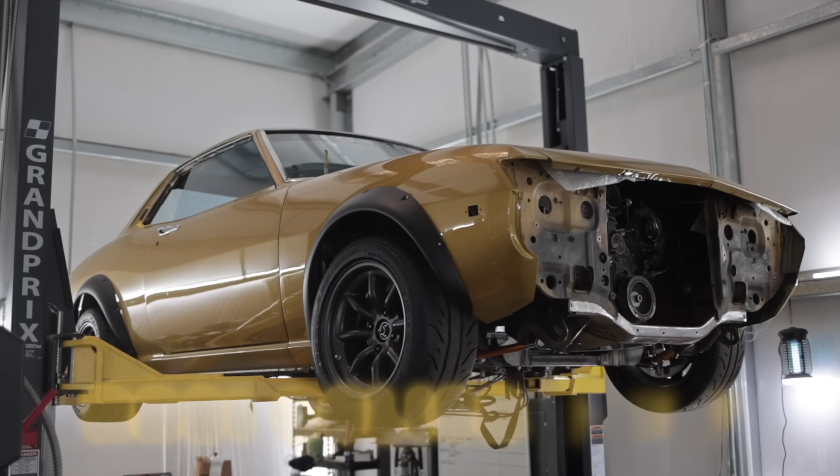Welcome to this. My 1974 RA21 Toyota Celica that will soon house this high compression built NA 2UZ V8.

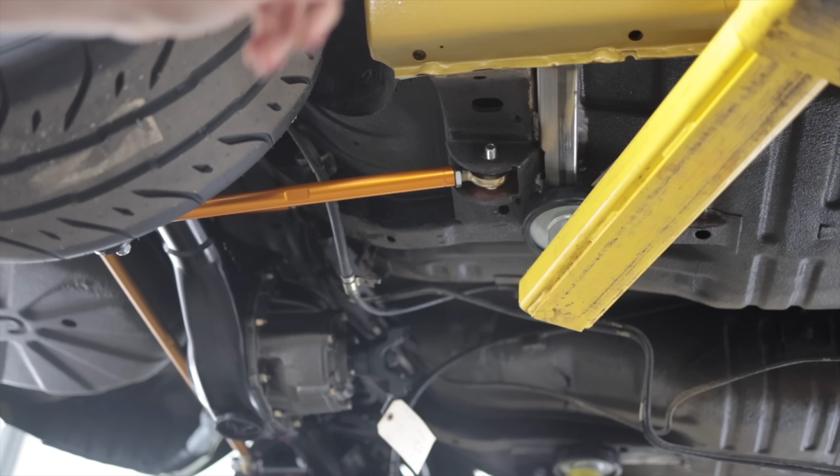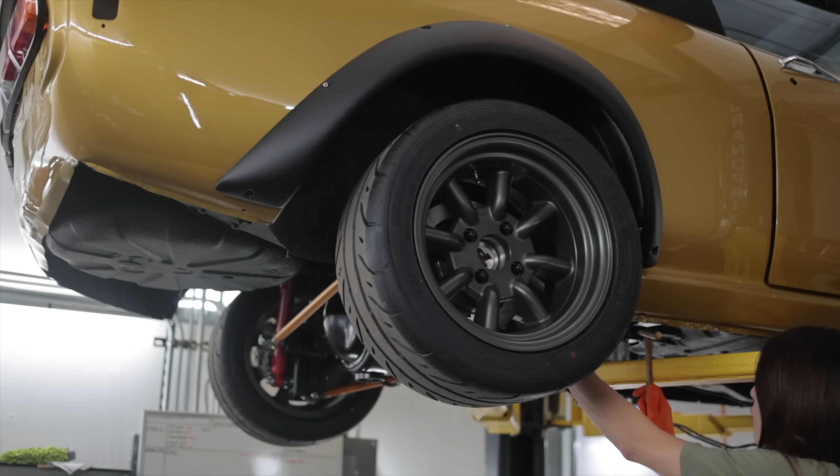If you're new and you'd like to get caught up on the last video where I attempted to teach myself how to TIG weld, up above my head is a link. That requires some welding, so I'm gonna try to actually put that to practice, even though I need more practice. The one thing I am capable of that I can say with certainty is tacking.

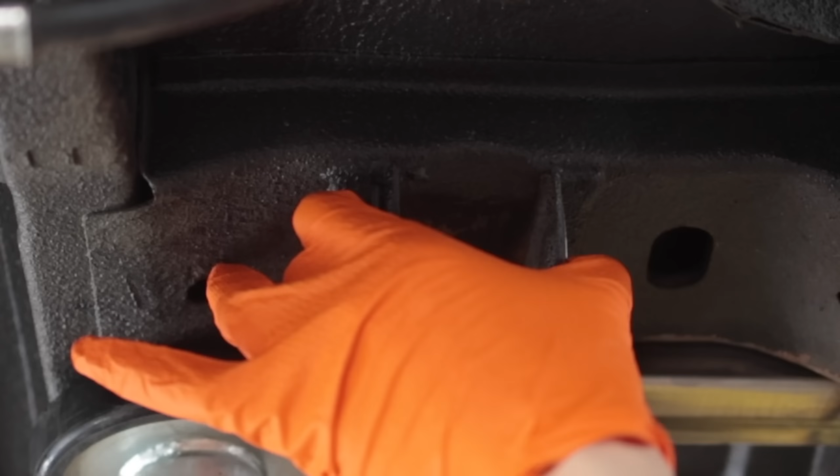If you recall two videos ago, I custom fabricated these little pieces for the lower four-link with the assistance of the plasma table at the shop next door. They need to get welded into place approximately like that, which I feel I am definitely more than capable of doing. So, okay, that's not light.

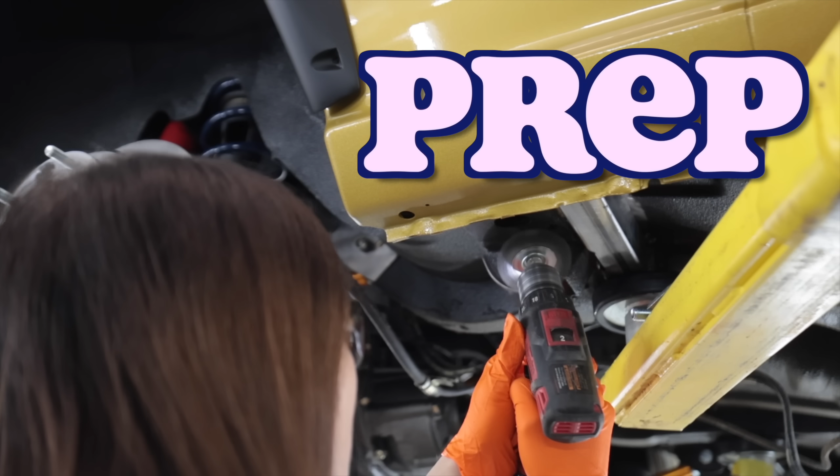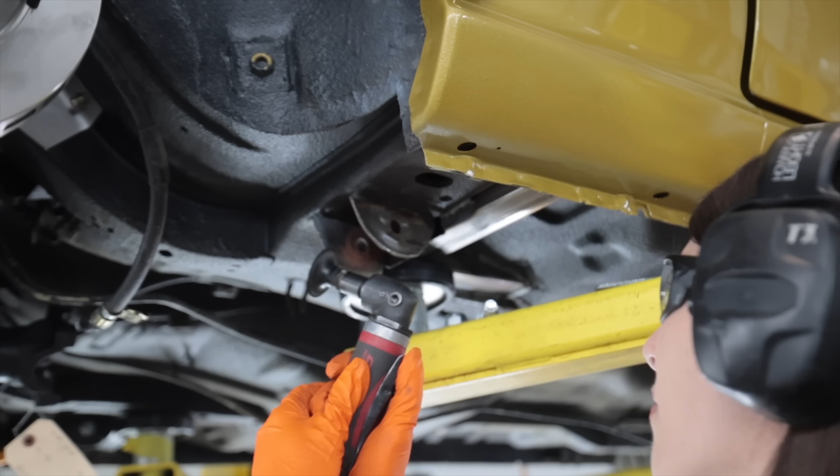Oh, last thing I want is sparks all over my watts. For those of you who never had the pleasure of smelling hot burning rubber undercoating, let's try a baby flapper disc for a Dremel. Maybe this will work. It smells a bit like a dumpster full of tires on fire. Yeah, it works like crap. Yeah, that's better. And that's definitely the last thing you want on a metal surface you're gonna try to weld, especially with a TIG welder. It has to be spotless.

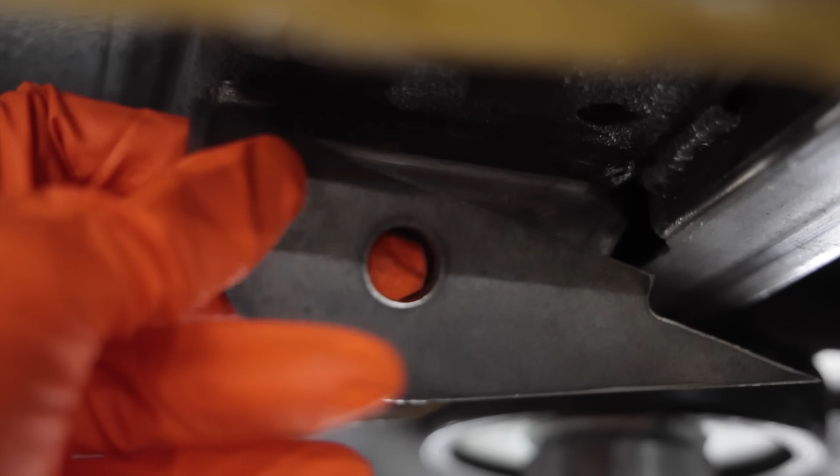I just realized I don't have any weld-through primer. When these two pieces are joined together with weld along the edges, there's gonna be a gap slightly through the bolt hole, and for obvious reasons I'm not gonna try to weld that bolt hole, it's just asking to break drill bits. I think what I'll try to do is take seam sealer and block off the backside and smush it down inside that hole. Then once a bolt is tight against it, I don't think there's any way a water molecule will be able to get down inside there.

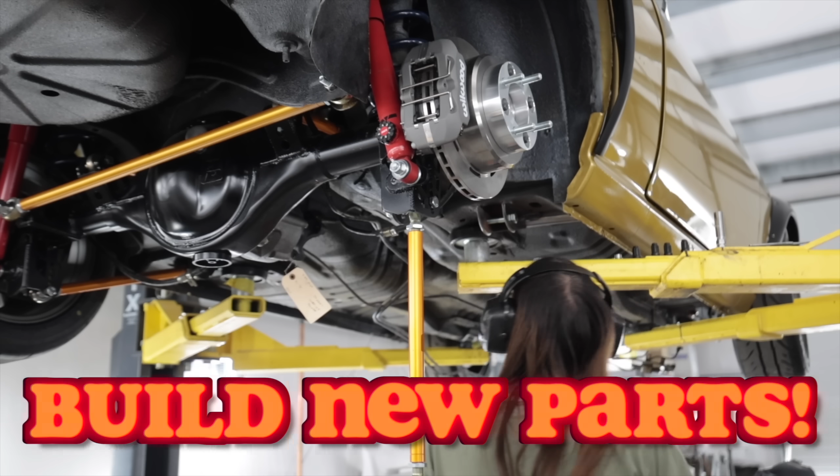That's good right there, gas. Gas flow is set just about 20 at the bottle. I zip tied the hand control to the torch, kind of where my index finger would naturally rest while I'm using it. In the last video I used the torch in my left hand, even though I'm right-handed, thinking it would be easier, but I don't think it is.

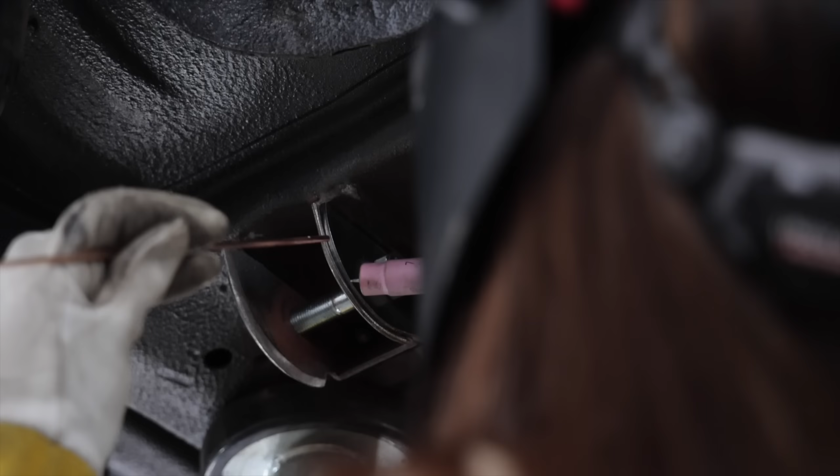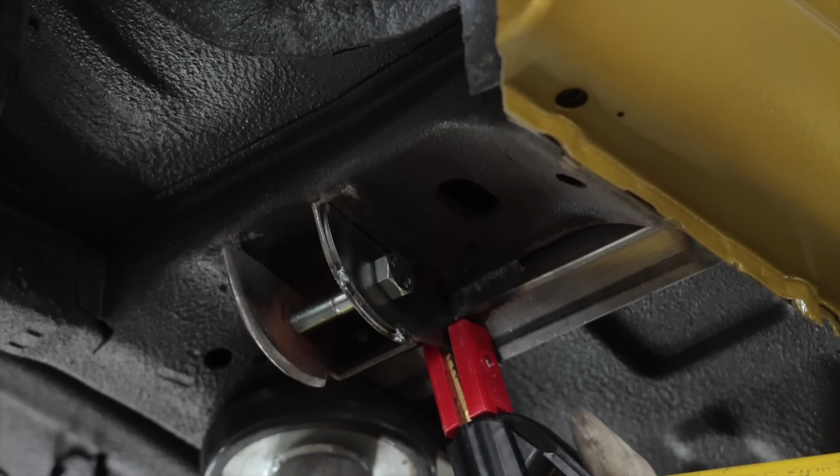I haven't had a chance to weld anything else since the last video went up because you watch every second I'm awake, essentially, on this channel, but I will try to slowly incorporate it more and more so I can get better at it. I think that'll hold it together. Even though the four-link uses Heim joints, so I don't really have to worry about it pinching because it can still pivot regardless. Aha, it's tacked.

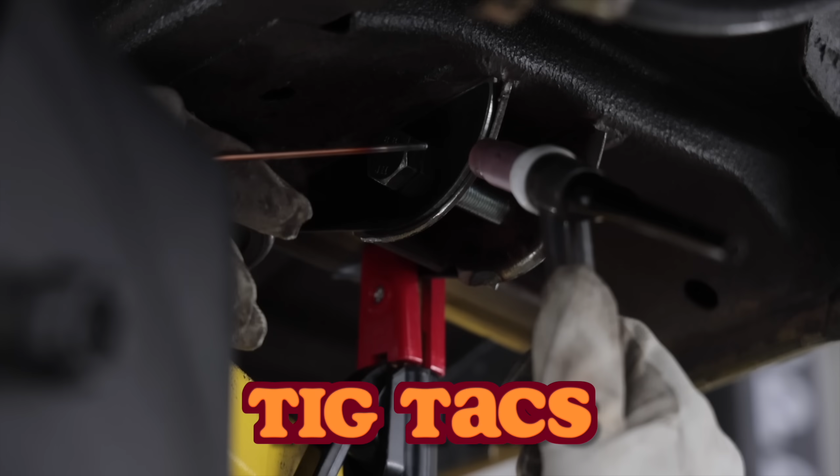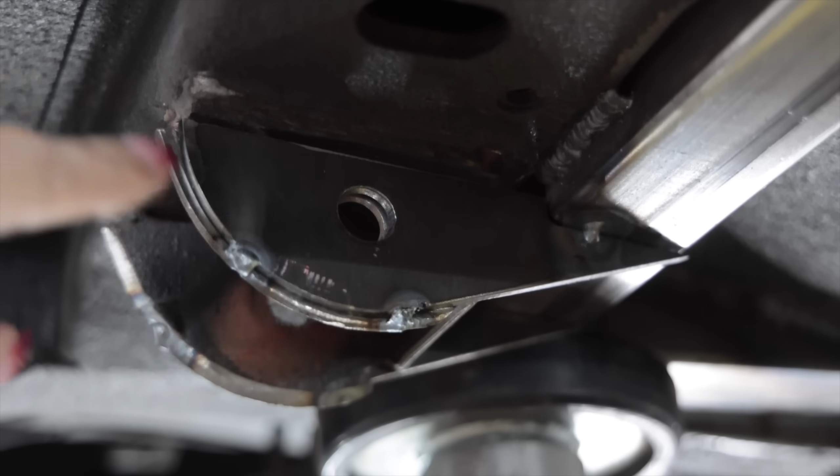Round number two. I have to still be careful with the welder on these little tabs because I don't want to induce too much heat and cause these angled brackets to warp, making it impossible for me to reinstall the four-link. TIG welding upside down kind of sucks, but this was still enjoyable. I wanted to try doing a bead, but I just know it's not very efficient. I have to get longer bolts.

Jeez, that was violent. With the magic of time-lapse, I will now make a few hours go by.

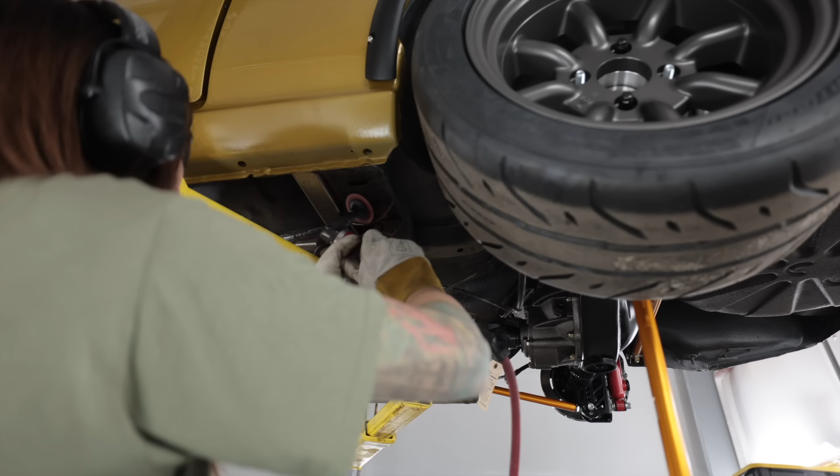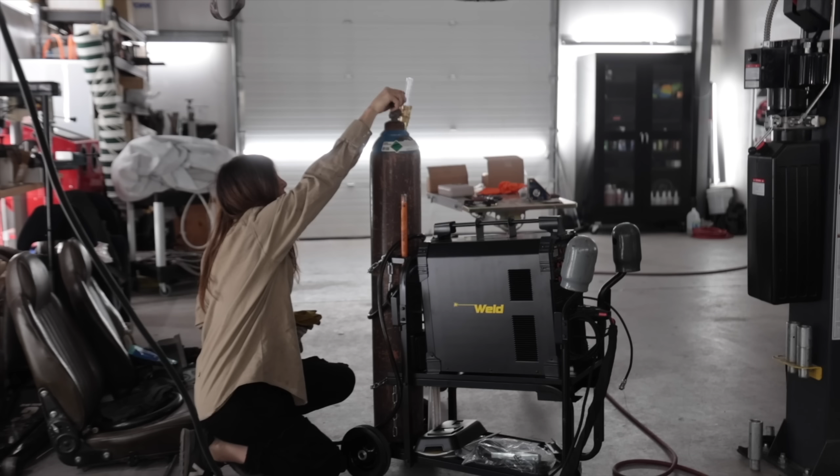Ouch. Aw man, the lift's in the way. I can't do the other one. The car has to get repositioned.

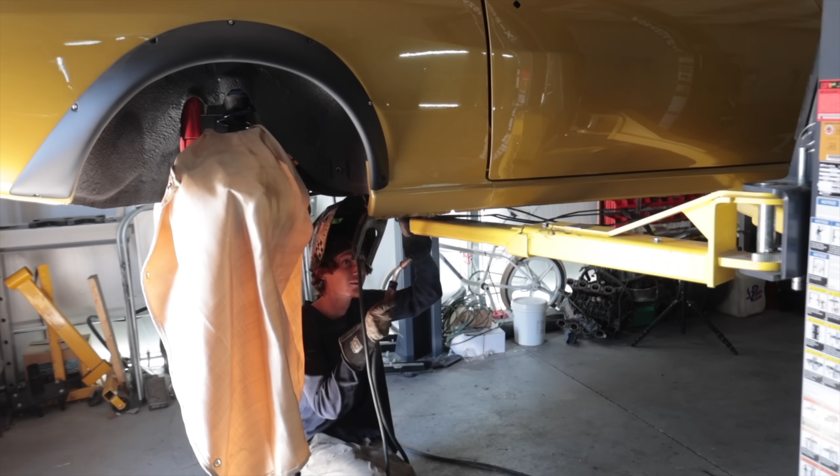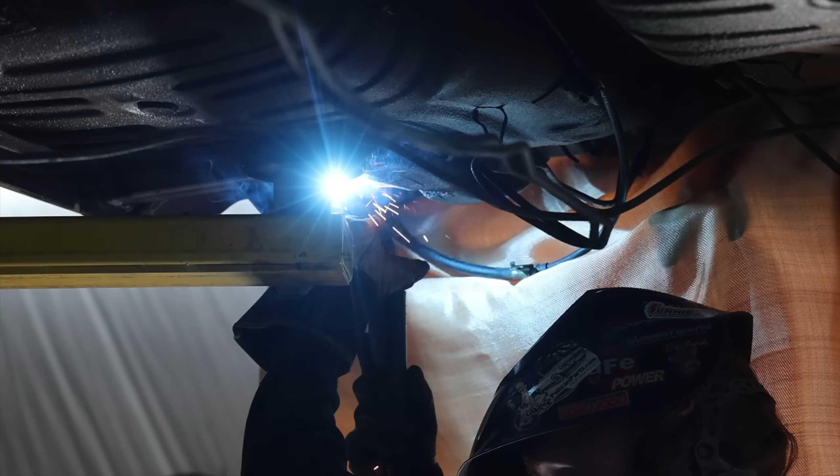I acquired a fabricator - actually, I stole Seth from the barbecue shop. Doing the underside of that car with all TIG welding was not exactly efficient, and I'm not the TIG welder to do that. So Seth is gonna do all of the welding with MIG, so it goes quicker. TIG gets way hotter and induces way more heat - it'll warp your brackets and stuff if you're not careful. The benefit of having someone do this that welds for a living is that even with a MIG welder, his worst MIG welds will look 10 times better than my best TIG welds.

Need to make a little filler piece for him.

It really does smell like bacon. Yeah, it sounds like bacon, but it smells like it.

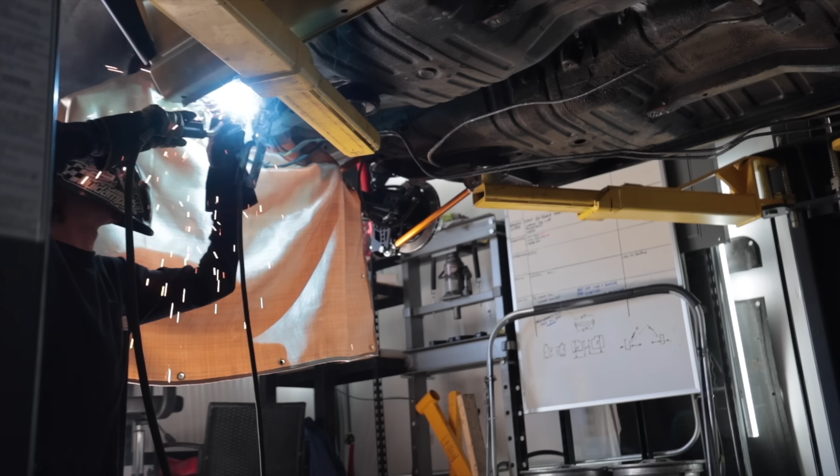It doesn't really matter what type of welding is happening underneath this car - it's still gonna look good and serve its purpose just fine. You just did what would have took me like 6 hours to do in like 2 minutes.

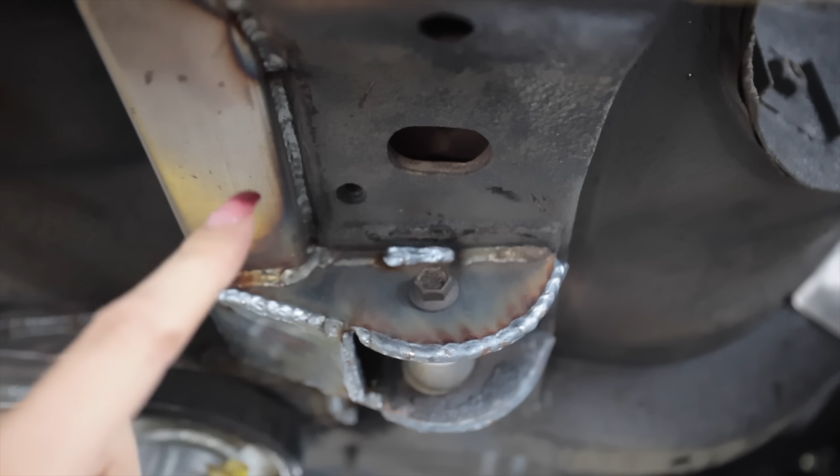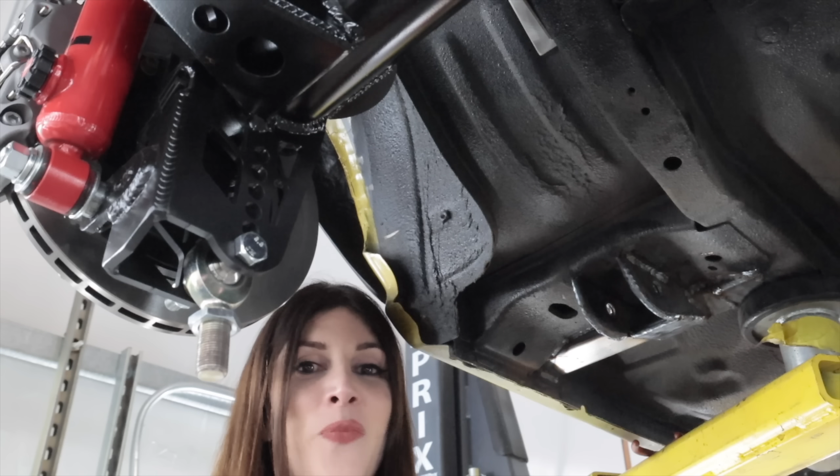Done. All the fabrication on the rear suspension now is complete, and I can start putting the interior in this car. Seth absolutely knocked this out of the park. All this stuff now is braced and welded up fully all the way around, so the four-link is much stronger into the chassis. I feel like when the Blackbird was getting all its additional chassis welds done - this is kind of the same thing, not really, but I really want to get some OEM looking JIS hardware for this anyway.

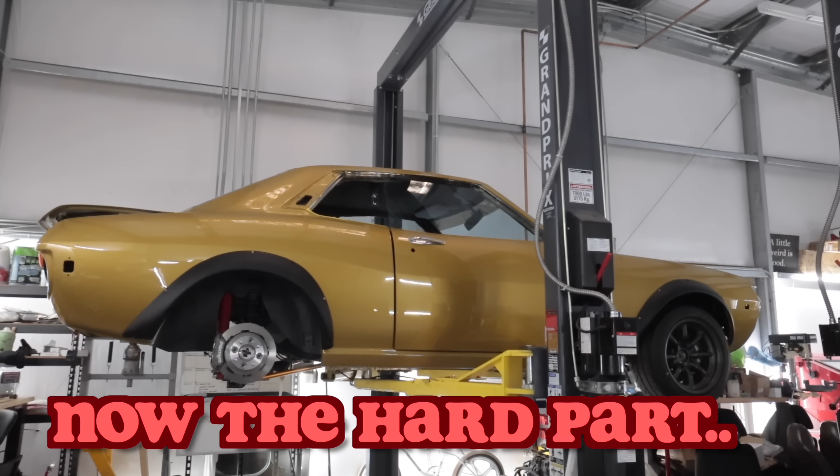Where did I put it? Ah, shapes, shapes - this thing's heavy. Why am I so awkward at everything? Why can't I just move this like a normal human?

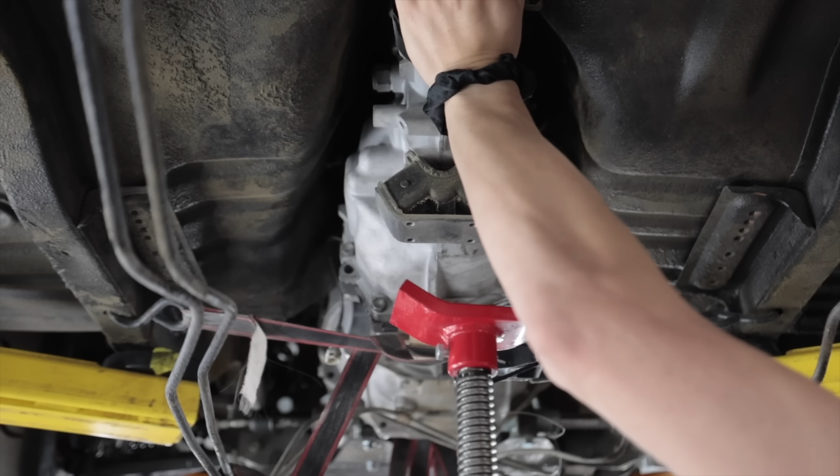I don't know if I should make this go higher. I guess the right angle is the angle in which it does not rub or hit anything, right? After doing some research, using this angle finder on the tail of the transmission, the maximum angle you want your drivetrain to be is 3 degrees before you run into drivetrain vibration issues, with ideal being 1.5 degrees.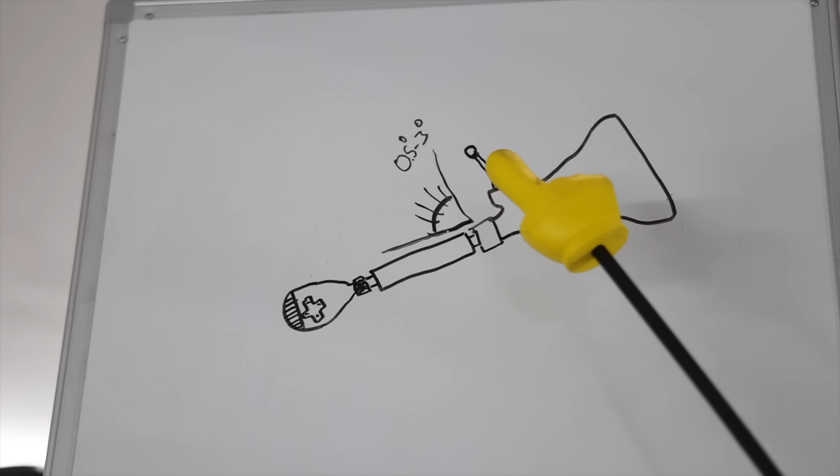A workaround some manufacturers do is you can angle the rear diff upward and also position your engine and transmission at a slope. That way you still keep that angle within that safe range. I can't really adjust it anyway because the bushing on the steering rack is about the width of a paper towel from the bottom of the oil pan.

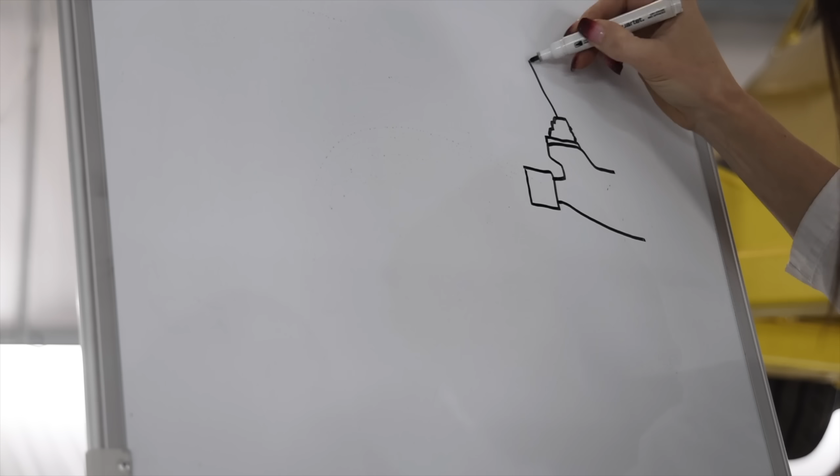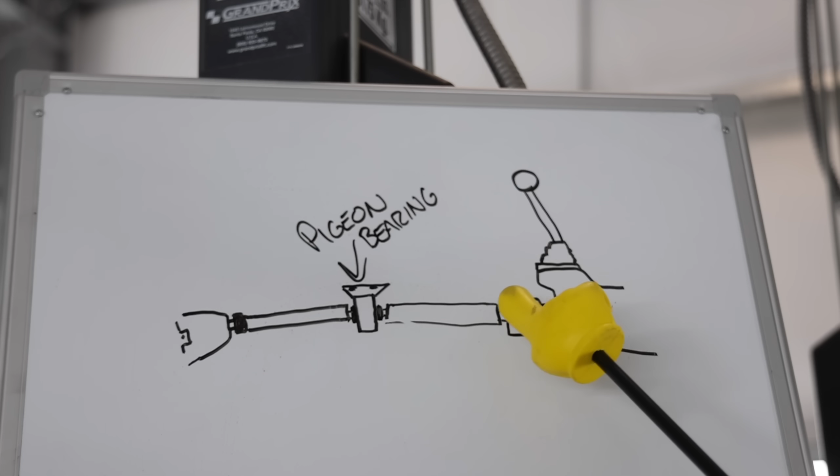The workaround that a lot of manufacturers do, and I believe this car actually had a 2-piece drive shaft if I remember correctly, is by using a pigeon bearing in the center - that is the correct terminology. That breaks up the span of the drive shaft, so you can still keep this within half to 3 degrees for a longer distance. Which means I'm definitely gonna have to do some more massaging of that firewall, which is why I didn't paint the engine bay when I painted the car.

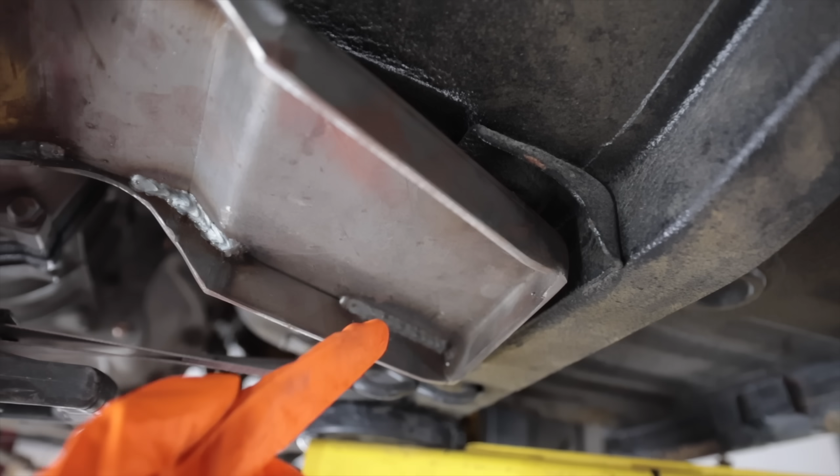I gotta figure out how to transfer these holes onto this without - how do I do that?

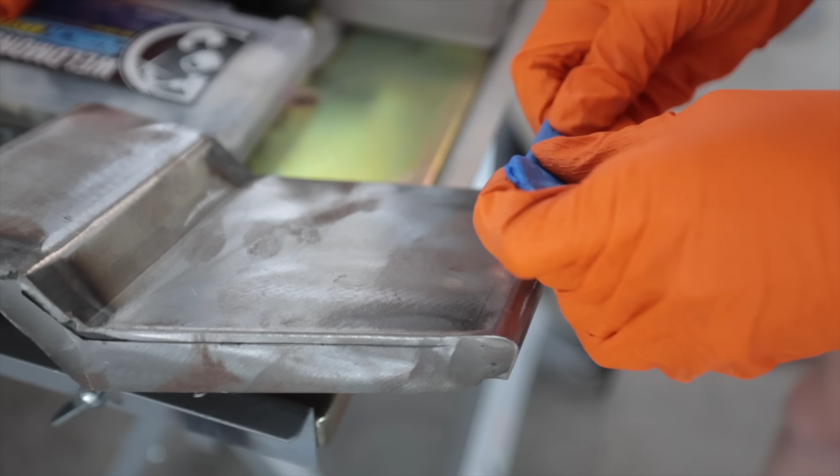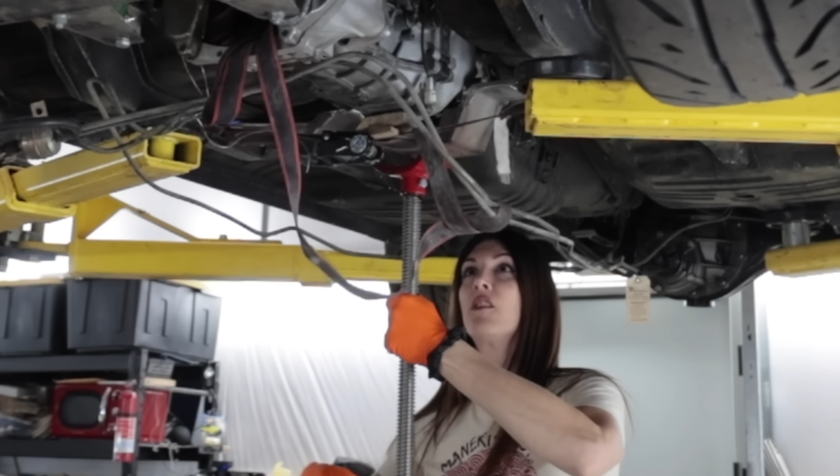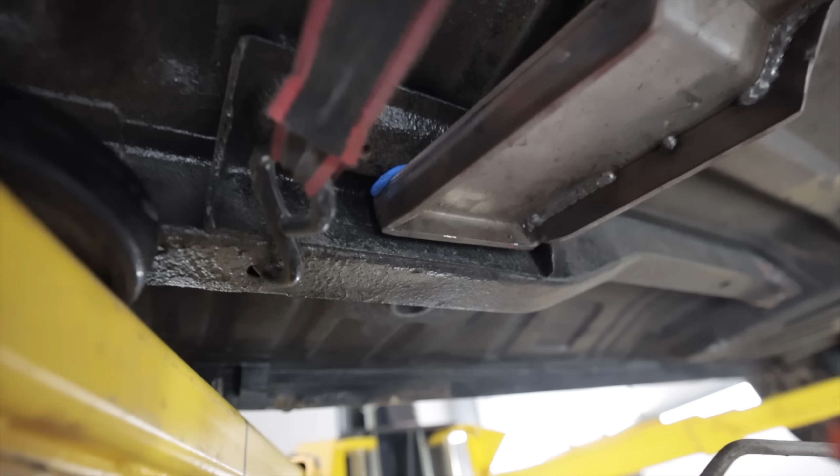Stick this right here. Now, in theory, if I smush this up, it should go into those holes and give me an idea where this goes. I gotta try to get it equal on the left and the right side, and that's almost not possible. Well, that's some sticky clay - it's literally holding it in place. Oh, it's definitely smushed, that's for sure.

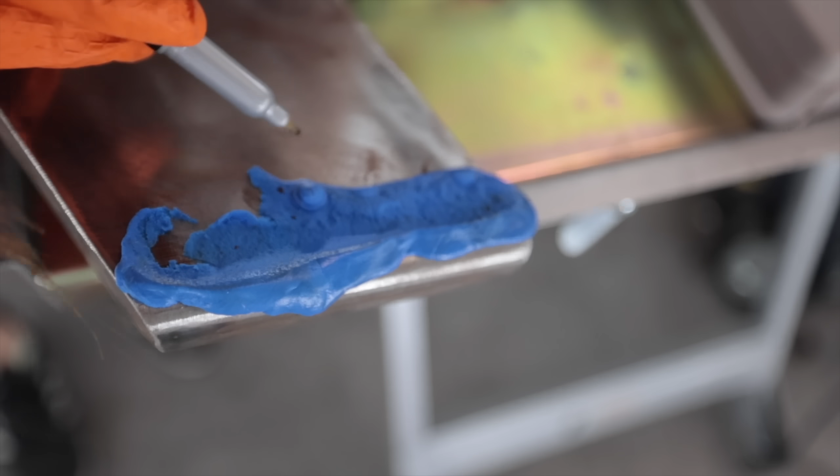Yeah, that was a fail. That was not the right answer. I can kind of see a hole right here.

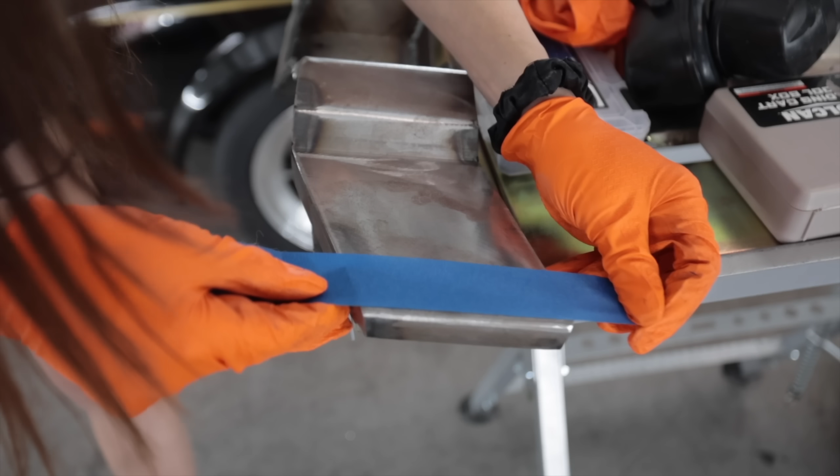Man, now it's impermeated in this piece of metal. People whose parents made them actually do their homework and are good at math are laughing at me right now, because this could be solved with equations. Just try this approach. Ah, joke's on you, math teacher. Art teacher was correct.

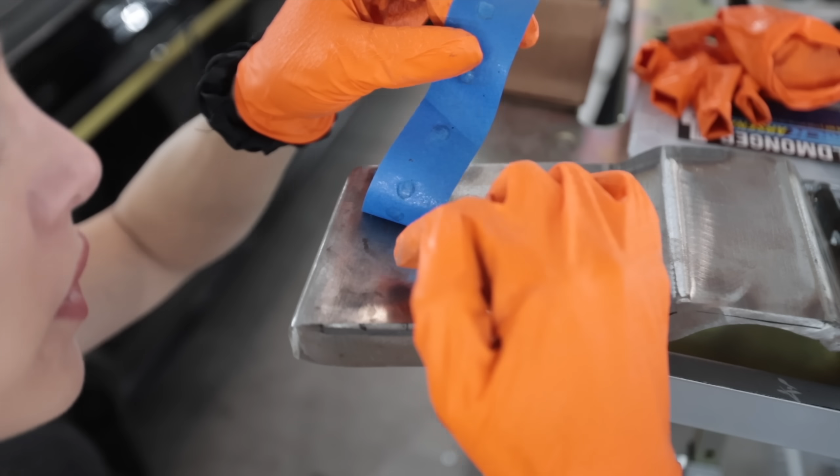I just line this tape up with those two marks I made, and also a little gold shadow from that one that's stuck. Oh, that lines up perfect.

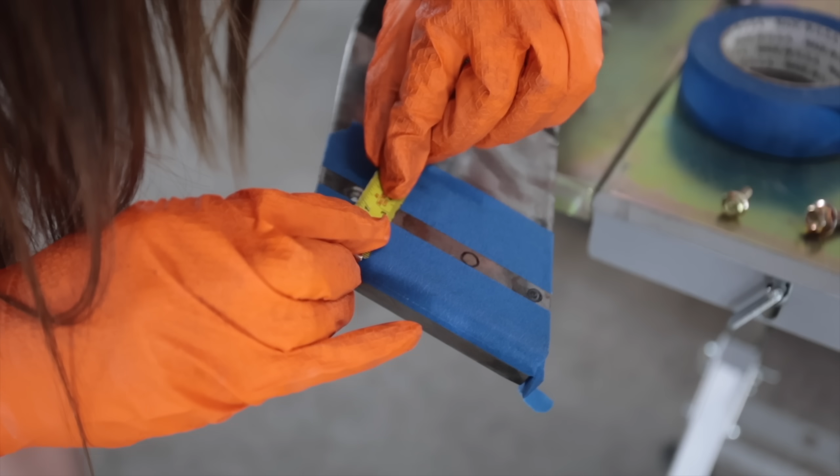That thing takes a lot of force. Hey, one side. I really hope I didn't screw this up because I'm not good at math.

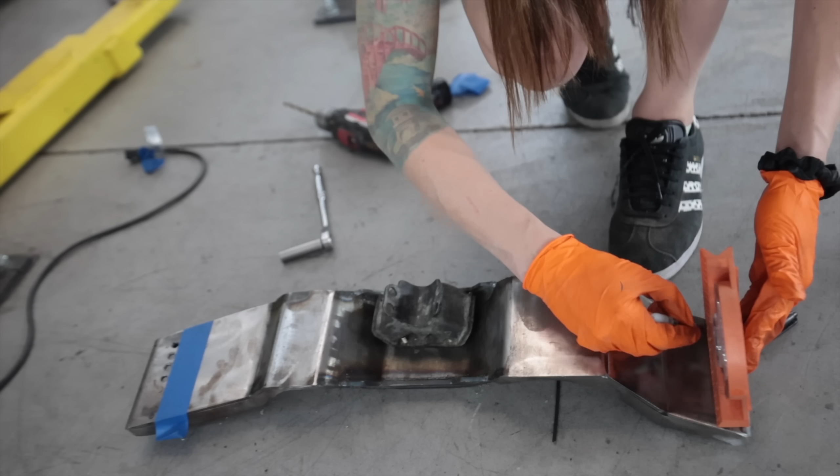All the holes line up exactly. I made all these holes the exact diameter. There's no wiggle room at all, which I don't know if it necessarily needs to be that way. Even though this is a Japanese car built in Japan, the distance from the holes on either side of the car is exactly two feet to the dot. That should be my center line of all the holes.

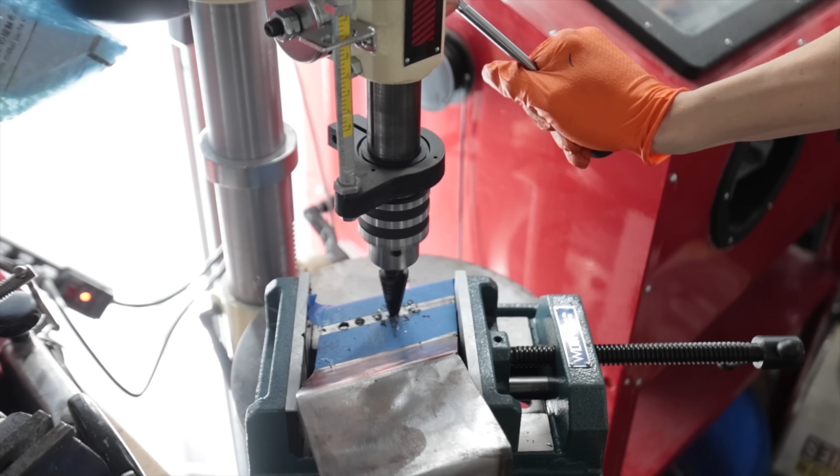Okay. Hell yeah. How did I screw that up?

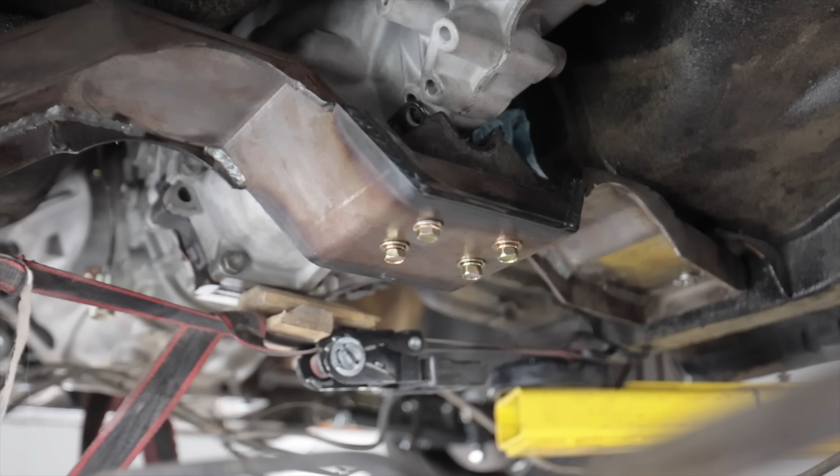I didn't catch it on camera, but these lock washers on these bolts are exploding. It's literally just barely hand tight, and I heard it—yeah, it was this one over here. It's not torqued whatsoever, and the washer just shattered.

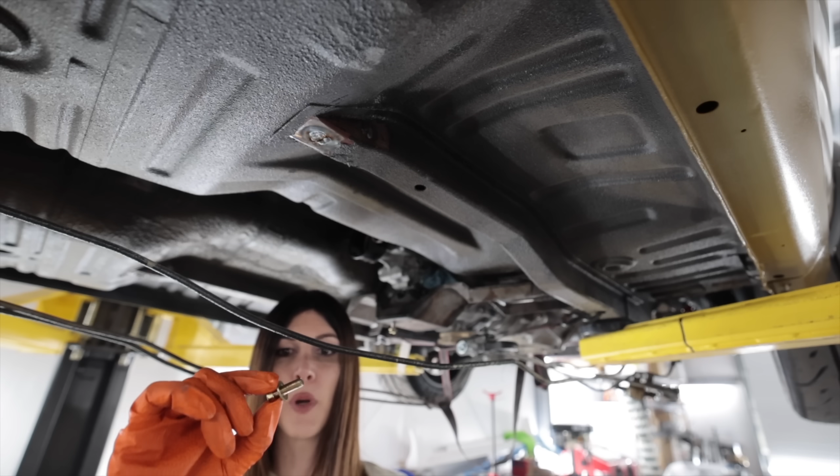Slight problem though, my transmission mount doesn't match up. Holy crap, the captured lock washer literally exploded. That was hand tight. None of this hardware is anywhere on the car—I was just using it for testing purposes. Definitely not gonna use any of this on the car.

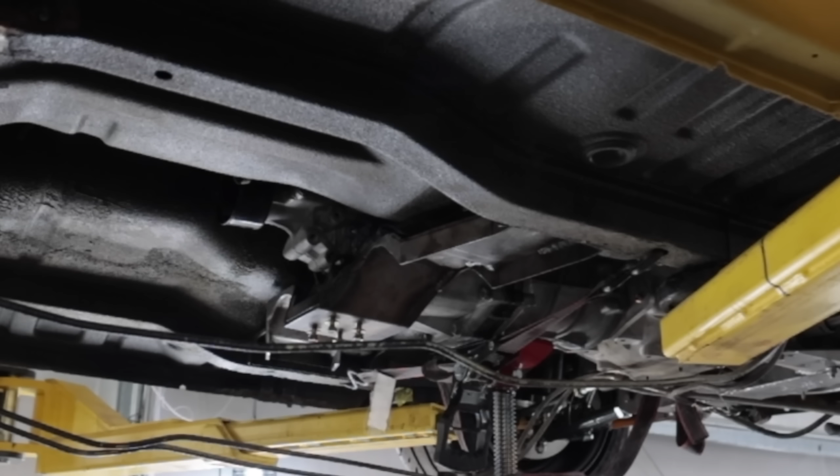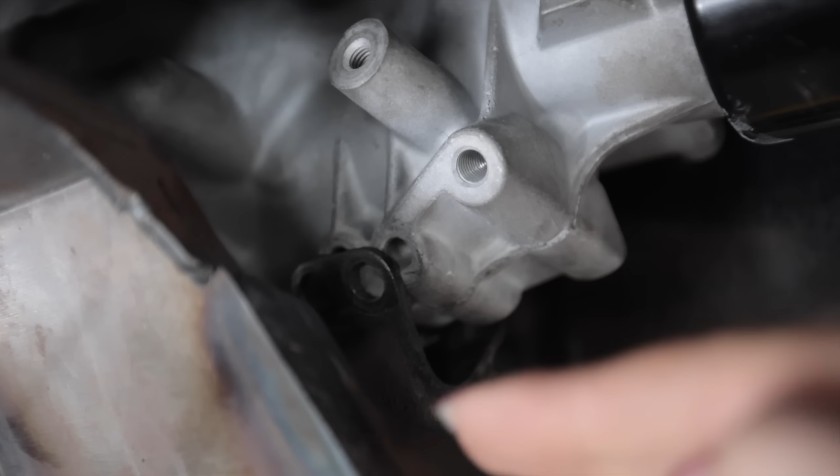Ooh, that's nerve-wracking. Man, the transmission mount doesn't work—it doesn't fit on two different axes. My oil pan's resting on the steering rack right now, so that's as far down as I can droop the tail of the transmission, plus I can't really anyway because of the angle. So this has to go up physically higher.

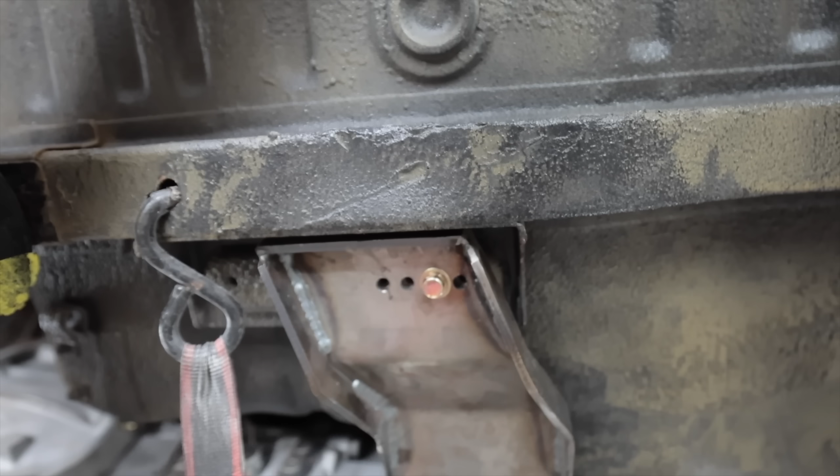Also, as you probably just noticed in that shot, the bolts need to go about a bolt width further back because I'm maxed out right here. I can't possibly move this back any further.

It hits. Situations like this are why you have the rinse and repeat cycle with project cars. Everyone does the same exact thing over and over, because the more rare an engine swap is, the more stuff you have to fabricate yourself from scratch.

Thankfully, I have a can-do attitude. Is that Aussie Man Reviews that says that? I love him, he's awesome.

I'm gonna do exactly what Toyota did from the factory. This is not supposed to be all the way down on this car. So up here, that's about where it needs to go—at least that's the angle it needs to go.

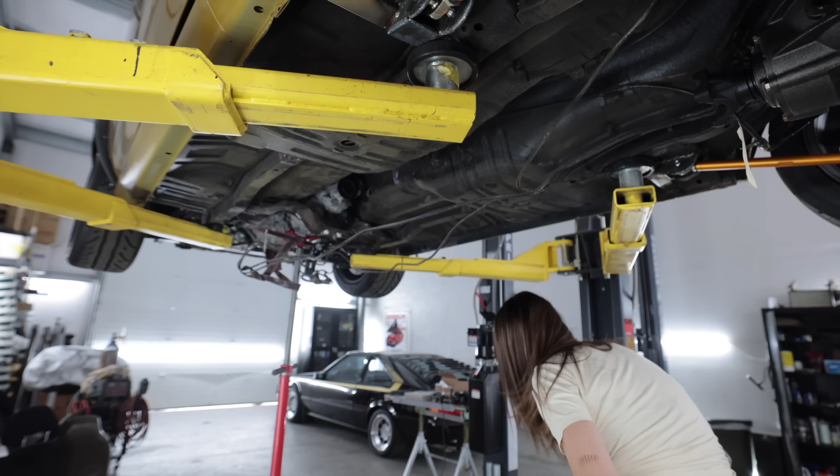Okay, if I remember correctly, that's literally how Toyota did it from the factory. This mount had a lower base and then a shelf that the hardware attached to. I just gotta do it like Toyota did.

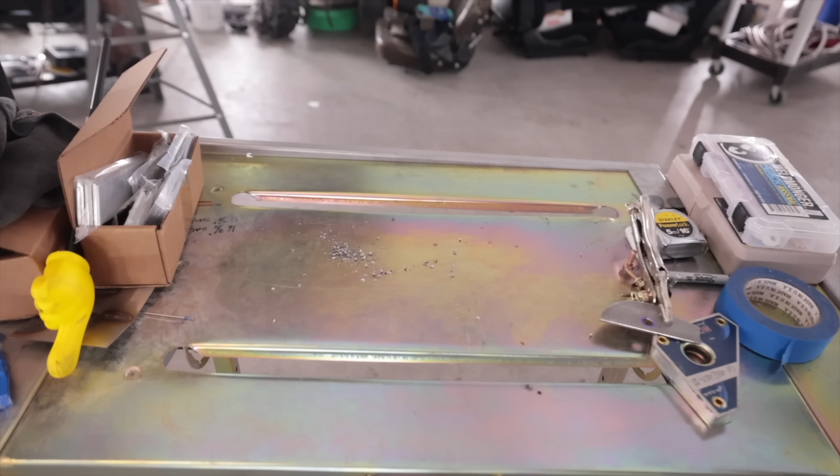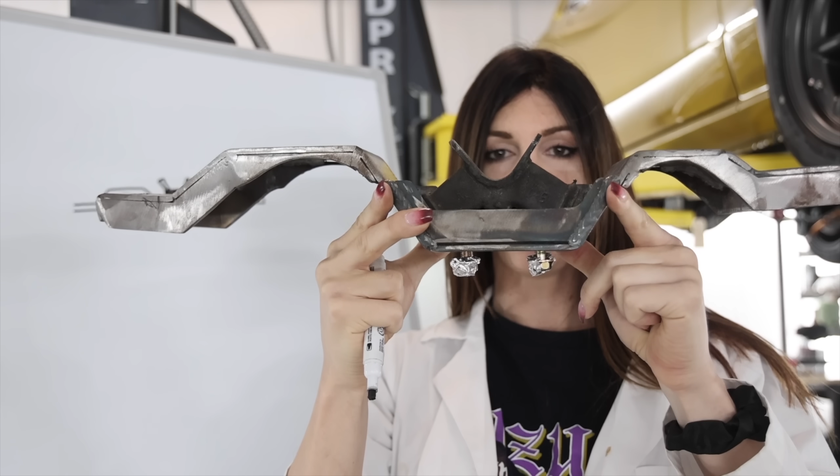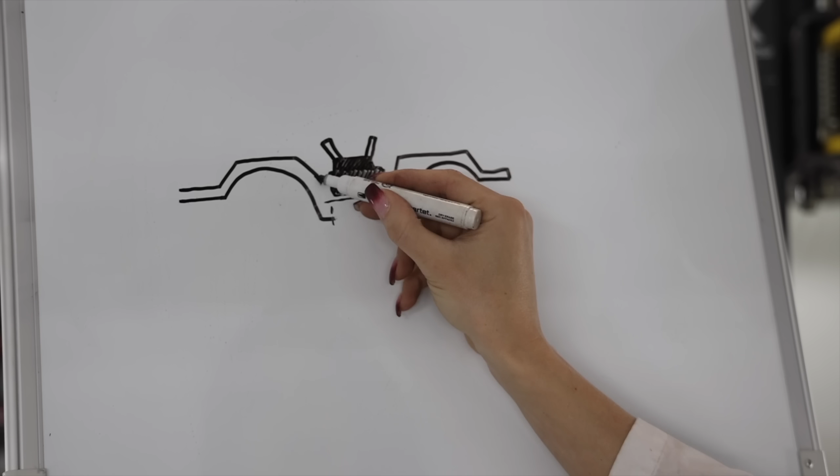The game plan for this is, the way Toyota did it—you can see currently I have the rubber transmission mount bolted to the very bottom of this transmission crossmember. There are two benefits to changing this. One, that hardware is exposed to getting ground off if the car bottoms out. What I'll essentially do is create a false bottom inside here, open this up, which is how Toyota had it originally. This is open on the bottom, and then this guy will bolt up to the center of it right there. I can also add angle to that plate in the center, which will adjust for the position of the transmission, the angle of it, to keep everything happy.

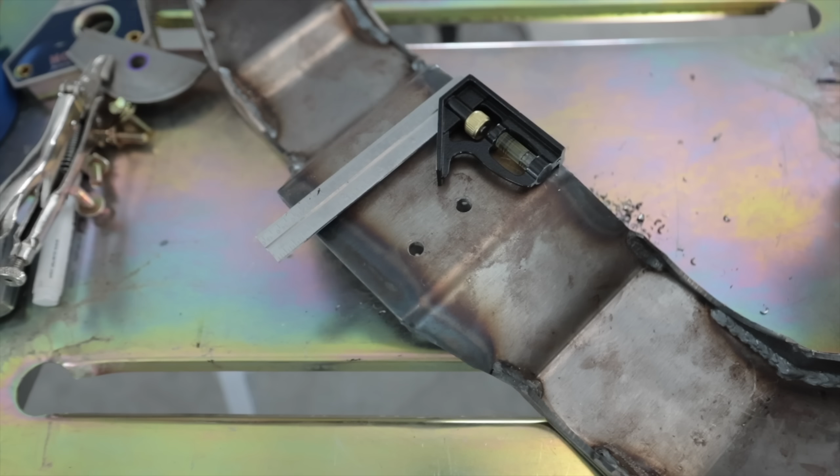Is that supposed to be like that? Does this thing move? Oh, it moves! That's crazy, okay. It's got a level on it.

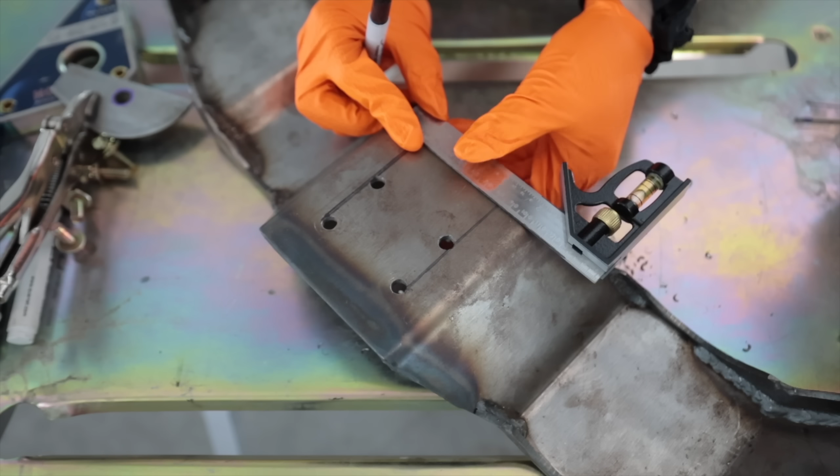What I'm about to do is also gonna help out with an issue some of you pointed out in a past video about drainage, because this thing is essentially a cup that's gonna collect water. So by having that false bottom, this is going to make for drainage way better.

My grammar is terrible. That would hurt if you got that on your skin.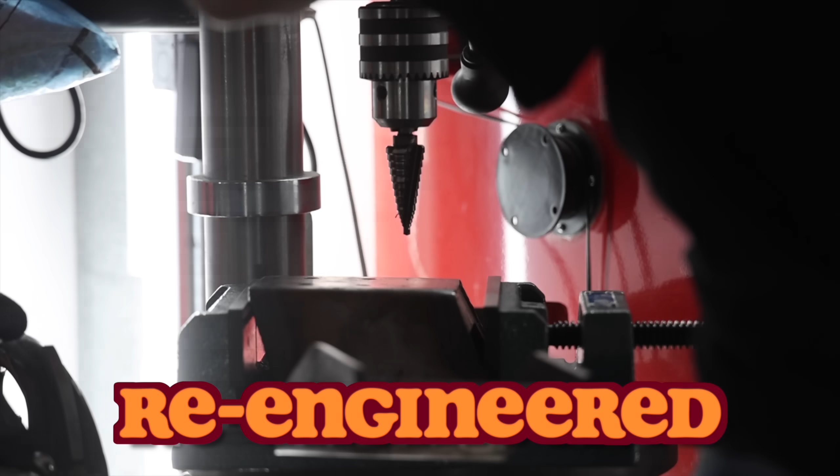That process is, by doing the holes on the corners, it'll make it prettier because it'll be rounded from the straight cuts. That's the downfall of a cutoff wheel, you usually get that little after-cut past your corner and it looks like crap.

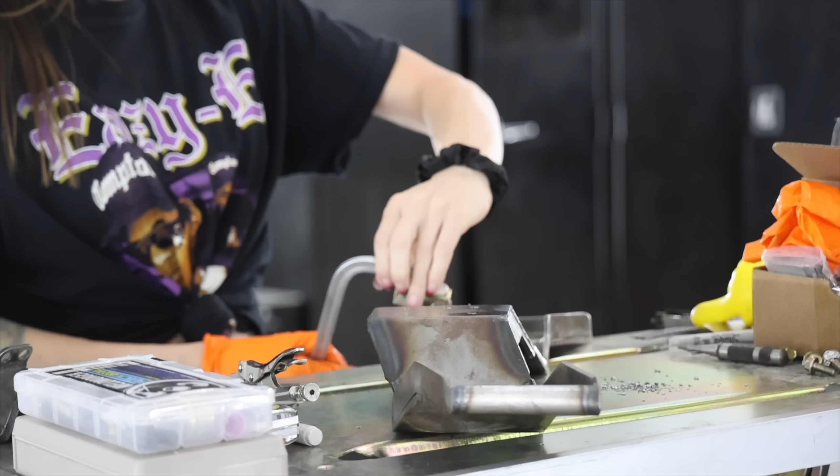I don't really know if this is the best place to cut this, but the last thing I want is this thing flying off and hitting me in the gut. That would really suck. I'd be like the grape lady where she was squishing the grapes on the news.

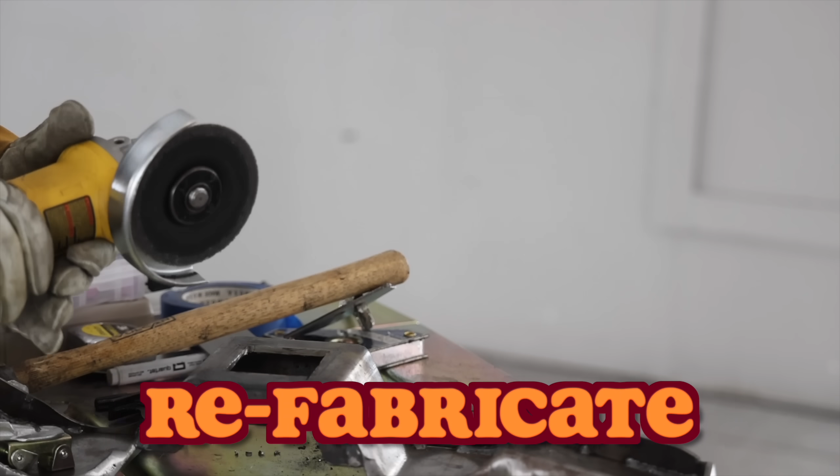That was very sketchy.

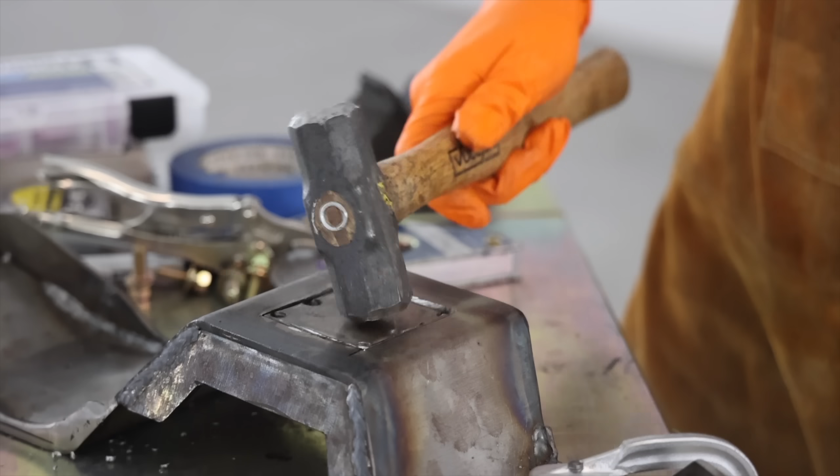Ooh, spicy. I don't dare touch these gloves. These gloves will be part of my hand for the rest of my life if I do.

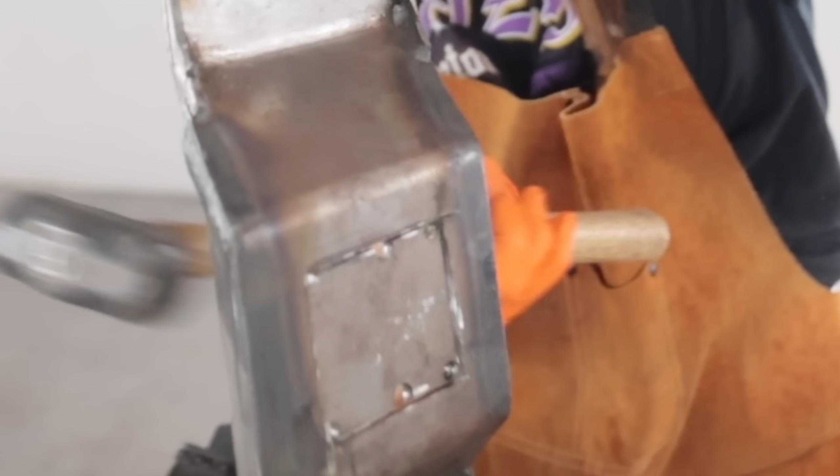That's not the worst cut. I can absolutely clean that up with a flapper disc and make it squared and pretty.

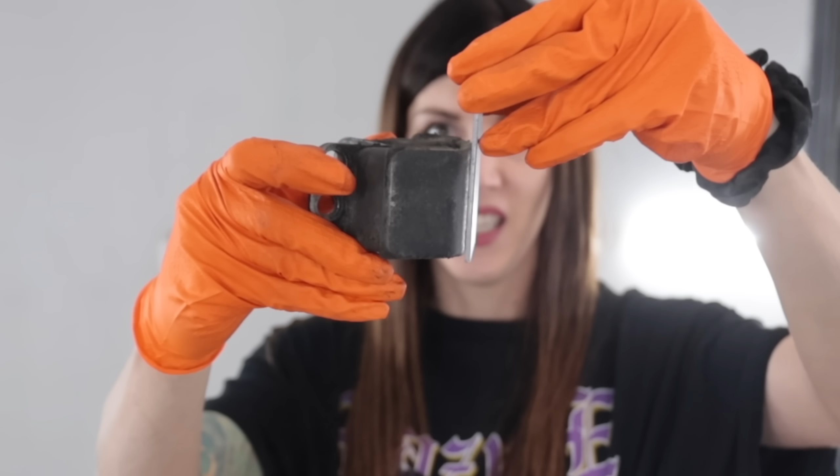Now if I take something like this, slightly wider with some elongated holes, it would allow this guy to be adjustable slightly. I forgot, I kept this thing over here.

Here's the factory crossmember. See how there's like a little shelf in the middle? See how it's kind of raised? It's higher on this side than it is on this side. This is pretty much flush. If this is mounted right above it, I won't be able to get a socket on the hardware if that hole is that size.

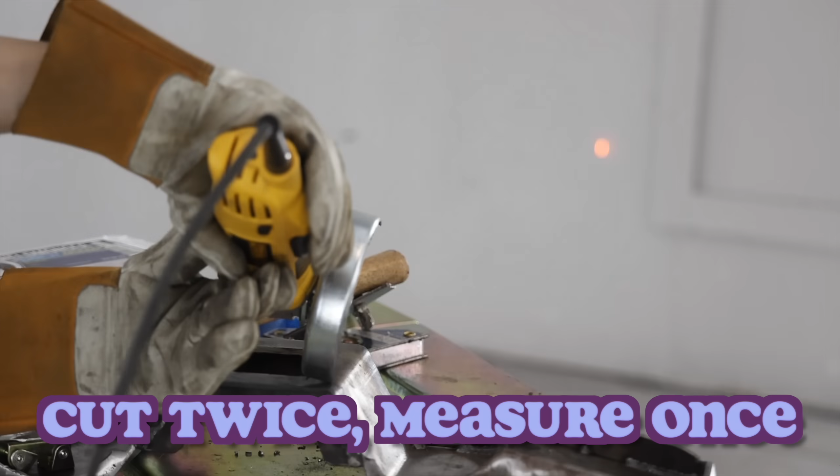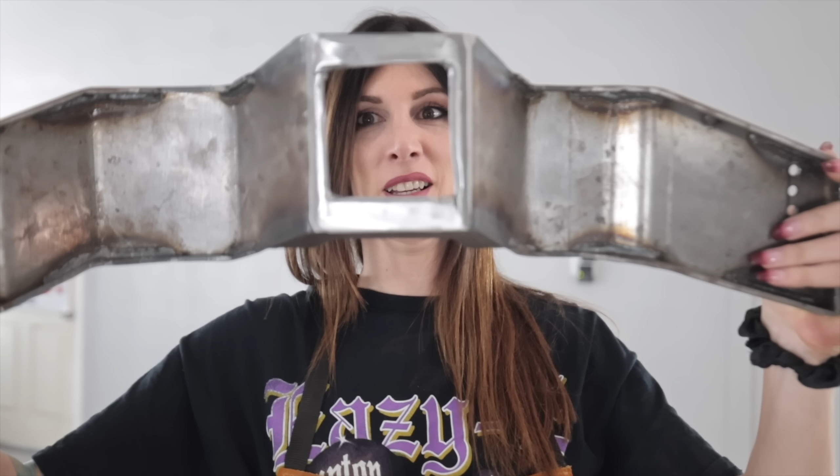It was a lot harder to cut than it looks. Don't judge me, okay? It's a little crooked. I gotta polish it up.

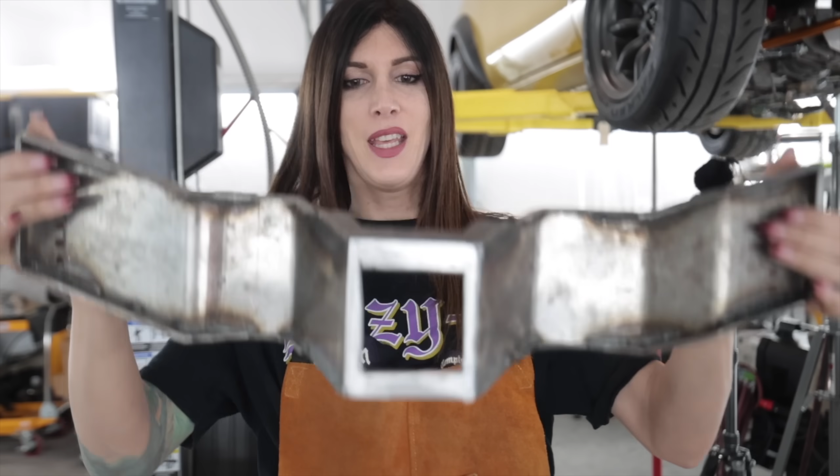See? Now you can get to all 4 bolts. There's plenty of room to get a socket on there. There's room for adjustability in that I can move this back and forth. And then once that floating shelf is in there for the transmission mount to sit on, I can weld it back up and there won't be any drainage issues.

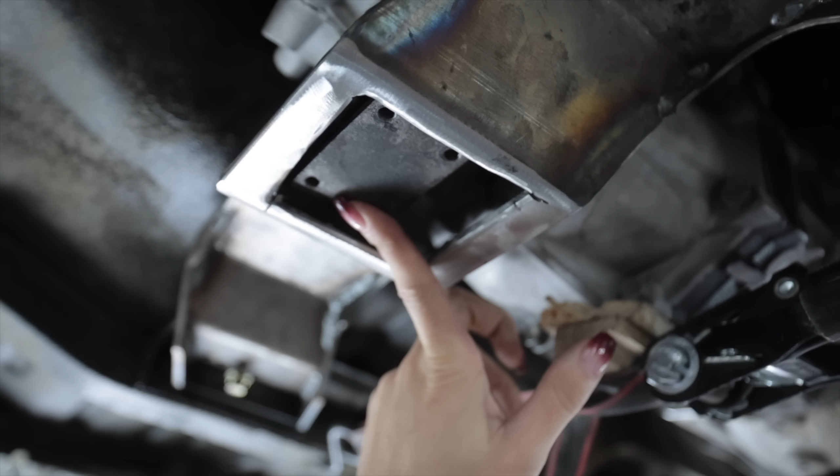So now all I have to do, this guy goes like that, and then the crossmember. And then there's enough room for me to put the plate where it needs to go. There'll be little gaps on the side, and then tack it where it needs to sit, take it back down, and then weld it all up exactly the way it needs to go. And it will fit perfect.

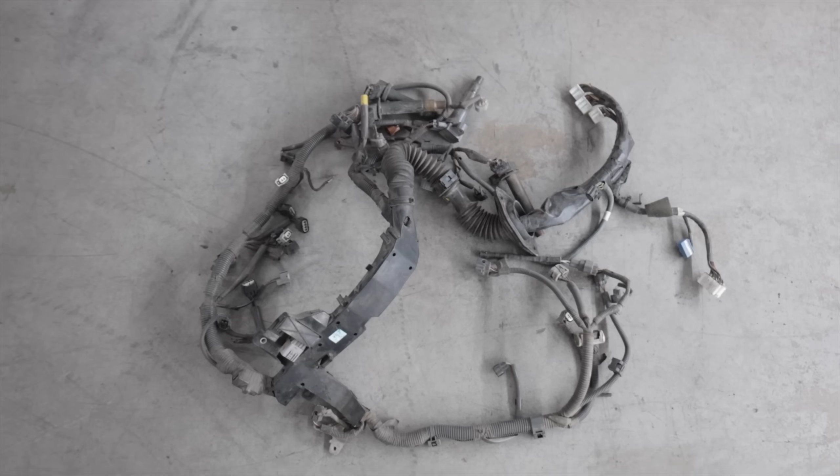I can either start on pulling this harness apart and building my own custom harness, which I gotta figure out what I'm doing for ECU, or I can start putting this engine together, getting ready to go back in the car. They're both equally as important, as well as I can start putting the interior stuff together too now that I got all the welding and the floor done.